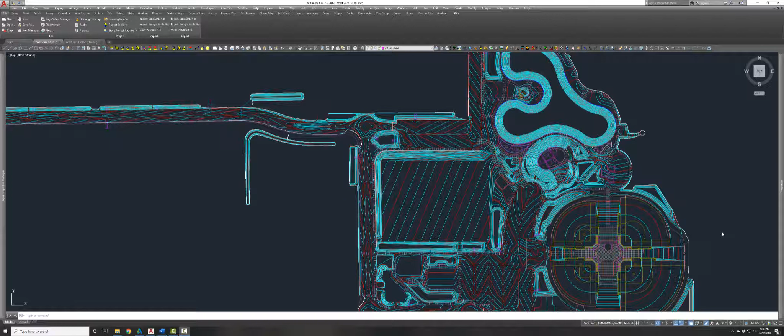I want to discuss a couple different surfaces on the same project. Now, we've all seen the surface that's really crappy and it's just a train wreck, but the thing is that this one is good. It's deceiving because it looks good, but it's going to cause problems. And here's the thing, you don't know where, and there's a lot of them, but they're big enough to make a mess of things, but they're small enough that a cursory review is not going to show any difficulties.

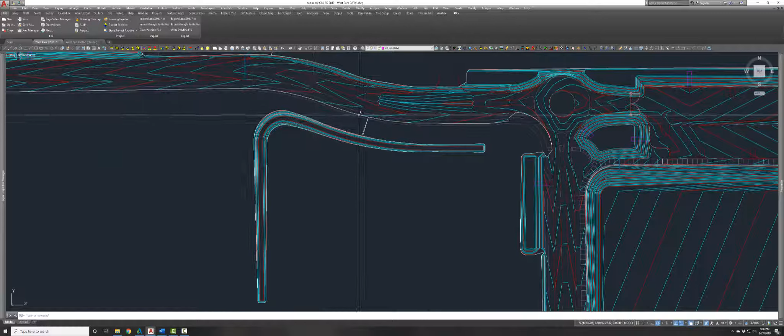Now, I'm just going to zip around here and show you a couple things that just aren't going to fly, like problems in the median here. You'll see there's probably a TIN line that's crossed here. And I've got this contoured at 1/4 of a foot, so it's pretty dense, but not crazy. We have another issue here.

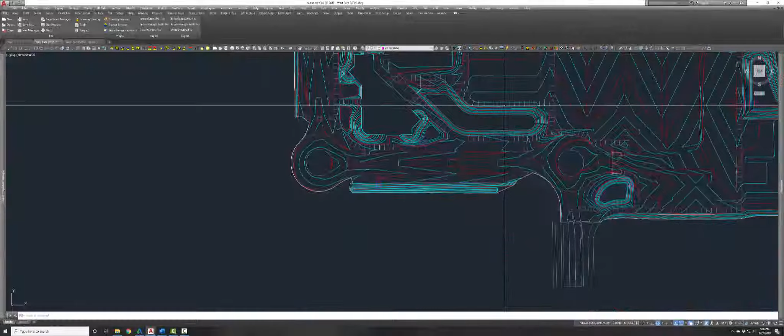The cul-de-sac is kind of squirrely coming into this parking area here, and you'll see this island here. There's some issues around the edge of this thing that are going to have to be fixed. Another thing is we come down here, this median section and these roundabouts are not in real decent shape, and they're going to cause problems. For rough grade, maybe you're okay, but when you get down to details, this thing is going to really give you some issues. Another thing is we've got some problems here with the detailed parking area.

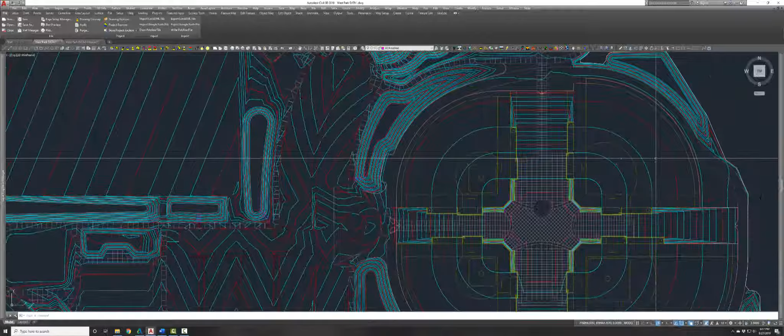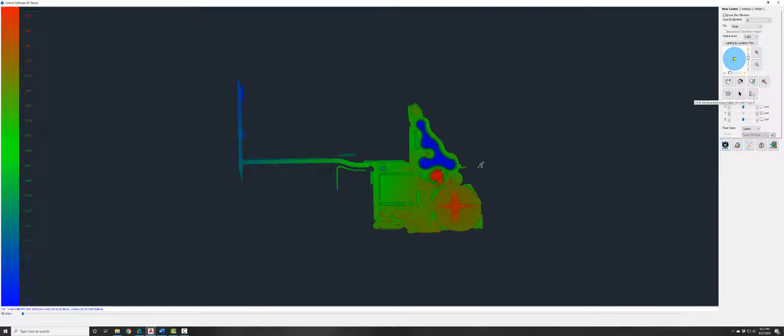The ball fields look okay. The grading here is decent. Let's take a look at the surface and I'll kind of show you what we've got. Crack this open. And let's just shut off these triangles here. And I like to bring things up to, on a job like this, probably 3 times vertical scale to give me a better idea of what I'm looking at.

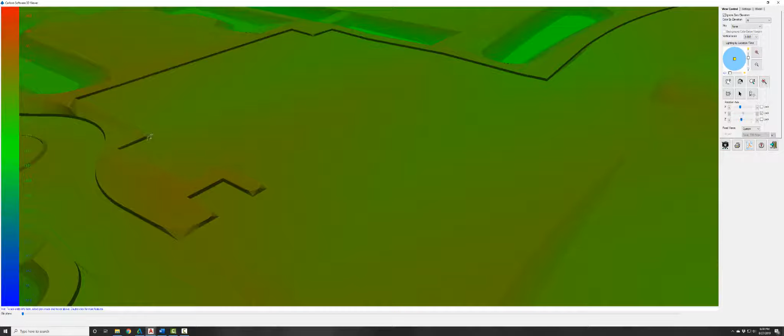So you'll see we've got these issues here with, tip this up, with this median. There's some things going on here that aren't right. We get over here, we've got some problems here. This cul-de-sac, though it looks round, has some bumps in it. There's problems in the parking area here. These little peninsulas are going to need some work, and they're not right. So if the field went out and graded them and you missed looking at them, it caused some issues.

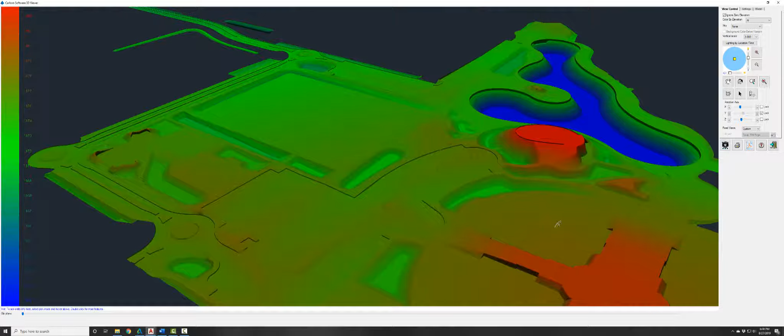Now, the pond's okay, and when I get to our file, I want to show you the differences that happen in some of these detailed grading areas. So you look at it, you think it's okay, and then we start seeing problems that aren't going to manifest themselves until you start doing layout and get down to detail. By then, it's kind of too late to put the thing back together.

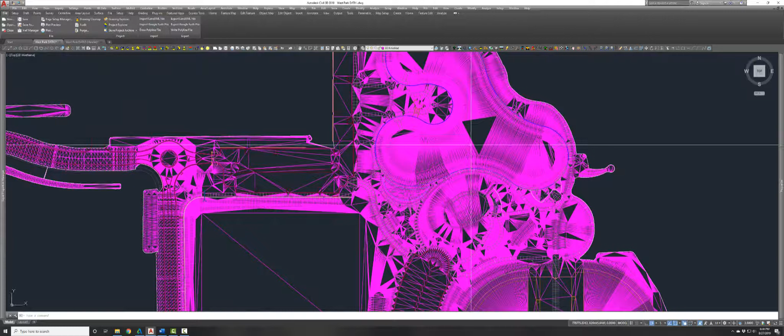The other big thing is the triangles here. Let me shut off the contours because that's going to help us have a little bit better view. The contours are okay. The TIN faces are causing us some trouble. Now, I love even triangles, and first of all, this is kind of dense. It's going to cause a slowdown in some machines and equipment. And then we've got some non-linear faces that just don't give you what you need.

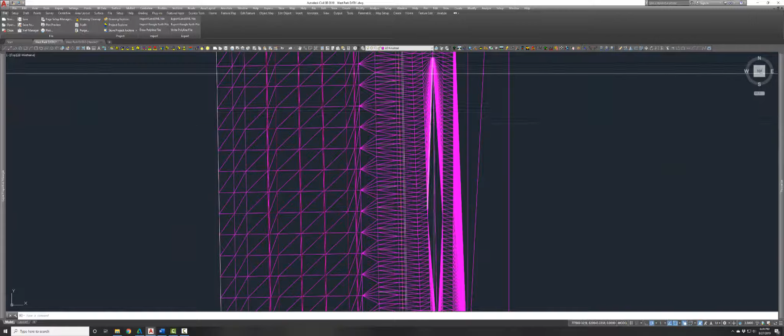Here's what I refer to as a many-to-one relationship. This line needs some additional points along it, but these lines have too many. So we go from one extreme to the other, and that causes a problem. Even if their intention was good and their elevations were done well, you have these difficulties with the TIN surface that need to get sorted out before this thing hits the field. Little things like this are going to cause you problems.

Now I want to jump over and take a look at our surface. We'll do that in the next video.